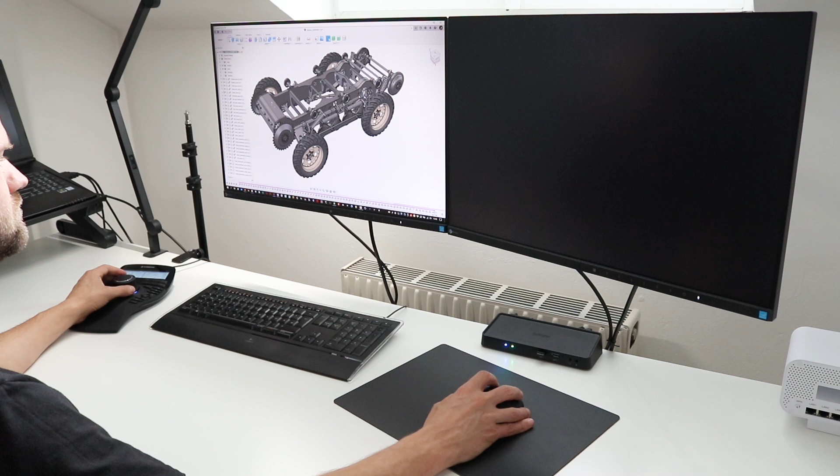Now next, I'm going to set everything up and install the driver. As a right-hander, I place the SpaceMouse on the left, close to my keyboard, so that I can easily move my left hand back and forth between it and the controller. The device itself is connected with a USB cable. On the right, I place the CadMouse on the supplied mousepad.

Now, the thing is, I haven't used a mouse for more than 15 years. I exclusively work with a graphic tablet. This means that I'm the last guy on earth who qualifies for reviewing a mouse, and for this reason, I will also focus on the SpaceMouse Enterprise only in this video.

Nevertheless, I've connected the CadMouse Pro via the little universal receiver for this demonstration, and I can say that it moves effortlessly over the smooth surface of the pad and lies very well in the hand. Like on the controller, all buttons are customizable on the mouse too.

As soon as everything is set up and connected, go to the 3Dconnexion website, click on Software, look for 3DxWare 10, which is the foundation of your 3Dconnexion experience. It's available at the top here. And then I simply download the driver for the operating system of my choice.

When you navigate back to the software page and scroll down a little bit, you will find a list of all supported 3D applications. And as you can see, this list is super long and contains all of the 3D programs that support the SpaceMouse Enterprise and the CadMouse Pro.

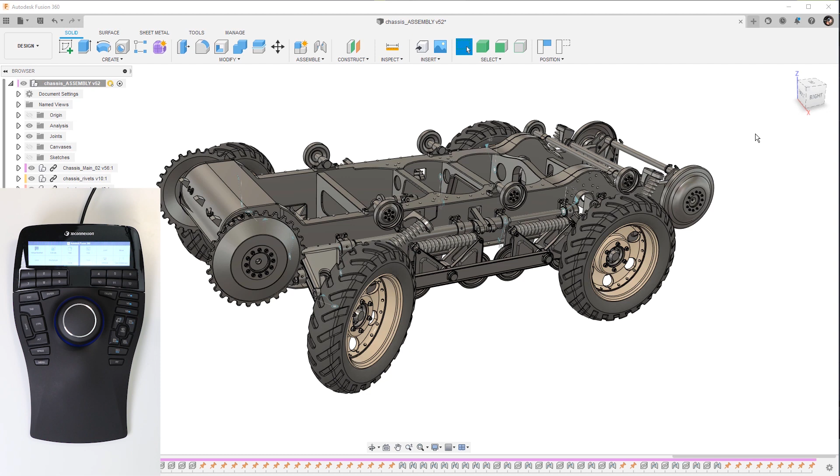And now, let's take a look at how to use the device. Now, let me show you how the controller allows up to 6 degrees of freedom.

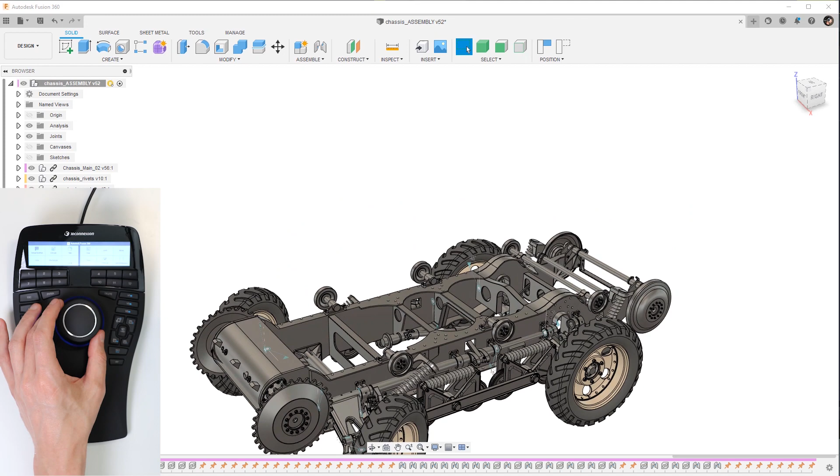So I'm here in Fusion 360, and as you can see, my left hand rests on the SpaceMouse. When I grab the controller and slightly shift it back and forth, I zoom in and zoom out in the viewport. When I move it left and right, I pan the model in the same directions. And when I push the controller down and pull it back up again, the model also moves up and down in the viewport. Now this covers 3 degrees of freedom, with 3 more to come.

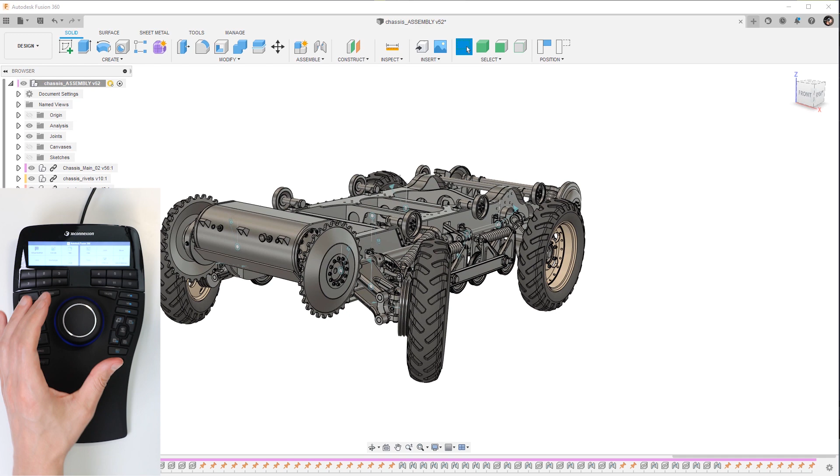When I slightly tilt the controller back and forth, the model rotates accordingly. When I tilt it to the side, it rotates sidewards. And when I rotate the controller along the Z-axis, the model does the same.

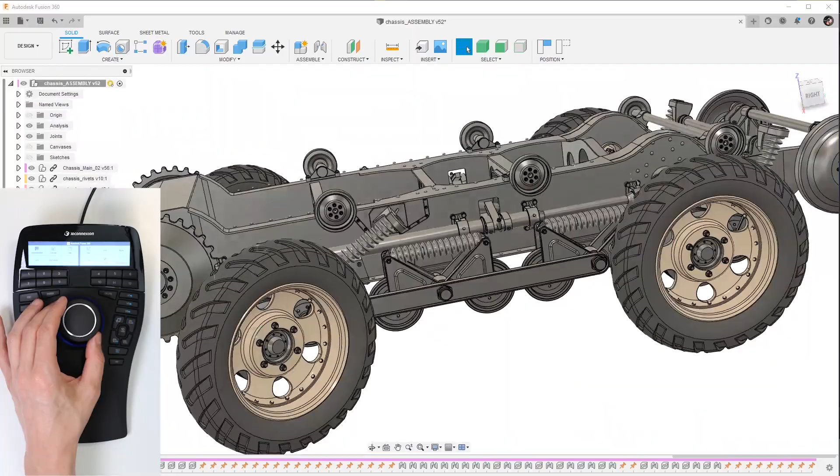So the thing is now that I can perform all of these movements simultaneously. I can zoom in and zoom out while rotating the model, and I can also pan the model while it's still rotating. And all of this allows a very fast and very precise positioning of the model in the viewport.

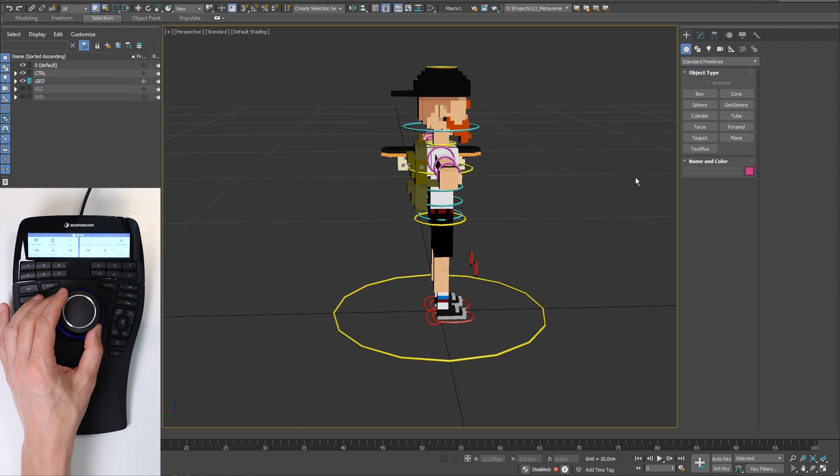When I now switch to 3ds Max, it behaves the exact same way, even if the shortcut keys for viewport navigation are assigned differently. And I'm sure you've noticed that it seems like I just barely touched the controller, but it actually takes quite some pressure as the joystick is mounted pretty firmly, so it's not wiggling around at all. But this is exactly what makes this precise positioning possible in the first place.

Next, let's talk about the buttons next to the controller and the ones below the LCD screen. The LCD screen is not a touch screen, so this means that the icons you see on the screen are linked to the 12 function keys below the screen.

This is probably a little bit hard to see here because the cover of the LCD screen is reflecting the light a little bit too much. But basically, if I switch back from 3ds Max to Fusion, these icons also change, because in Fusion, different tools and different features are assigned to these 12 function keys.

Then on the left, we have 9 keyboard modifiers. And on the right, we have 5 view keys and 3 additional custom view keys. This one here is a lock key, and this one takes away some of the degrees of freedom of the controller. And down here, we have a fit key, which basically centers the model, or centers the camera back to the model, in the viewport of pretty much every 3D application.

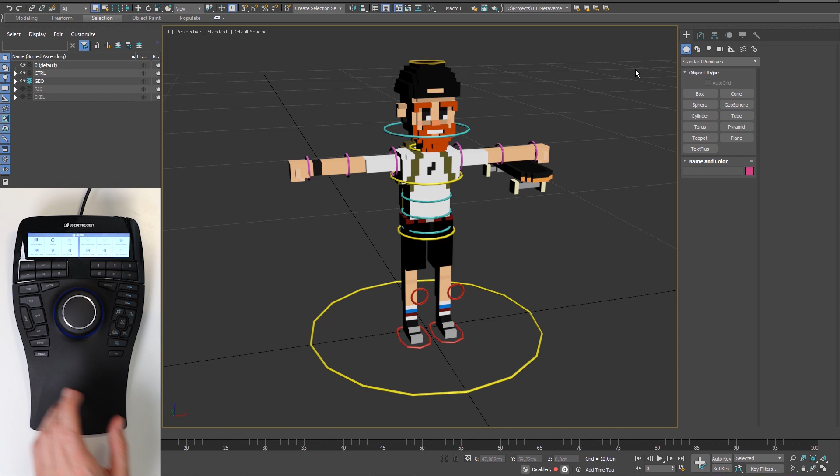Now let's start with the menu button first. When I press it, the property window pops up. As you can see, it tells us that we are currently working in 3ds Max. Down here, you can select the device.

So the SpaceMouse Enterprise is currently selected. I could switch over to the CadMouse Pro wireless, and in this case, the menu down here also changes a little bit. So let's switch back to the SpaceMouse again.

Here we can change the LCD screen settings. I can, for instance, lower the brightness. If I move the slider over to the very left, I basically turn off the screen, and down here I can change the icon size from small to large. So the difference is not that huge, but I'm gonna keep it at small for the moment.

And here you can change it to icons only or text only, and it changes immediately also on the screen. So I keep it on icons and text, and confirm this.

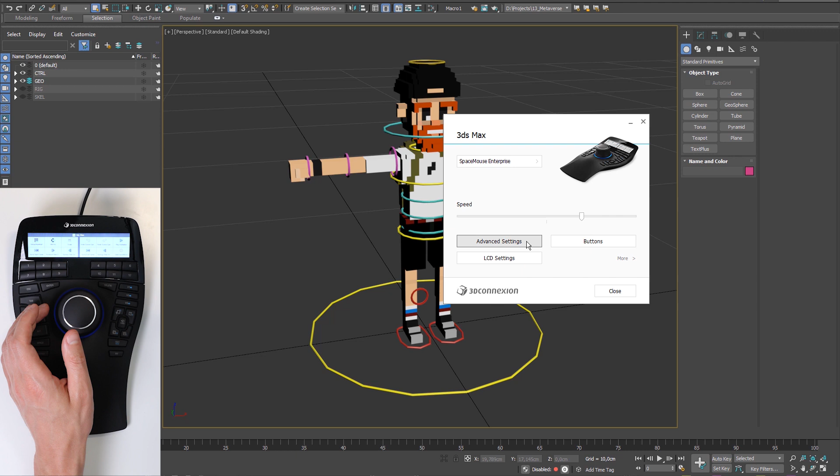And now let's take a look at the advanced settings here. So when I click on it, again, these settings are individual for every 3D application you're currently working in. These are not universal settings, and this also means that the settings, or the amount of settings, changes depending on the application you use.

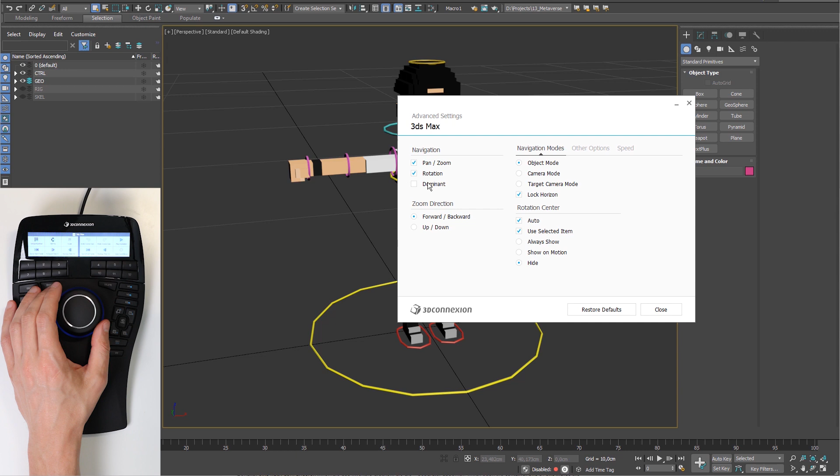Now, when you enable dominant, and let me move the model over to the side so that we can see what's going on. When you enable dominant under navigation, then you basically take away the ability to pan, zoom, and rotate the model simultaneously. So this basically means that I now zoom, pan, and rotate one after the other.

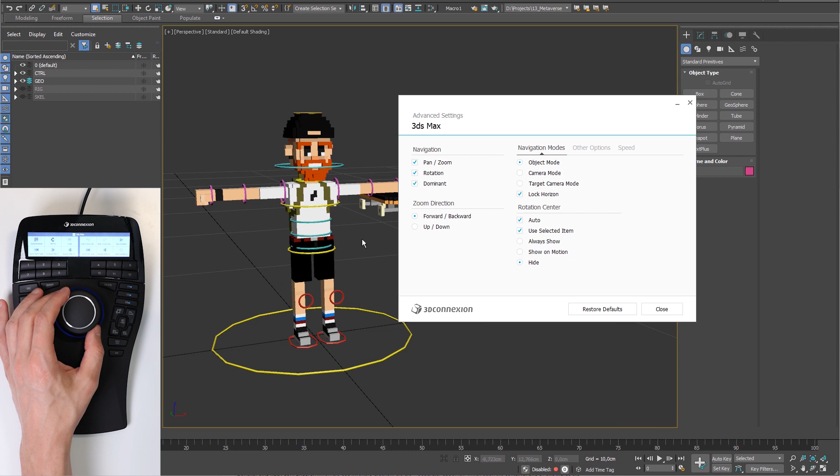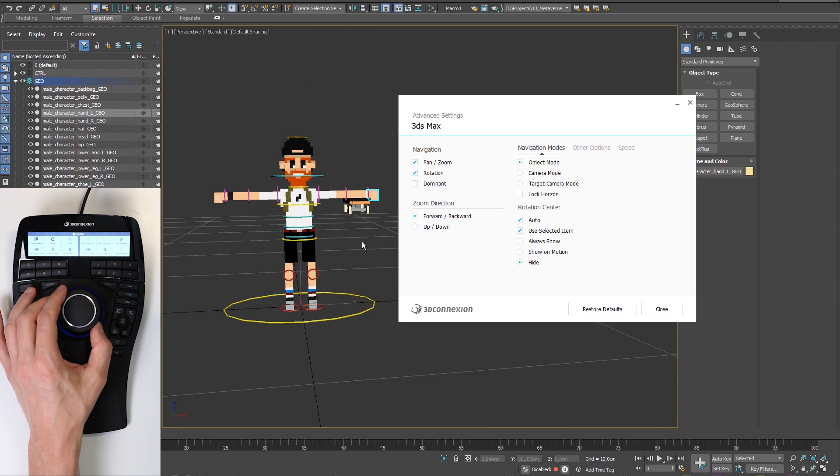And whenever you feel that the controller behaves a little bit strange, then this is usually because this dominant function is enabled. So make sure that this one is always unchecked to have access to the 6 degrees of freedom all the time. In 3ds Max, the horizon is usually locked. So when I uncheck this one here, I can tilt the camera around in the viewport, which is probably not the best idea. So if I enable lock horizon again and touch the controller, it snaps back in place.

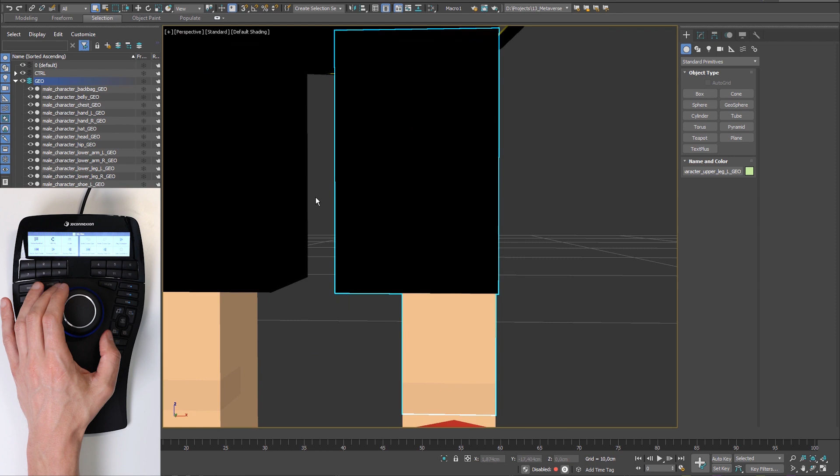Now for the rotation center, auto and use selected item is enabled. So this means that when I, for instance, select the upper leg here and click the fit button, it zooms into this element, and then also the center of rotation lies inside the upper leg. The same goes, for instance, when I select the hand here, then the center of rotation is inside the hand.

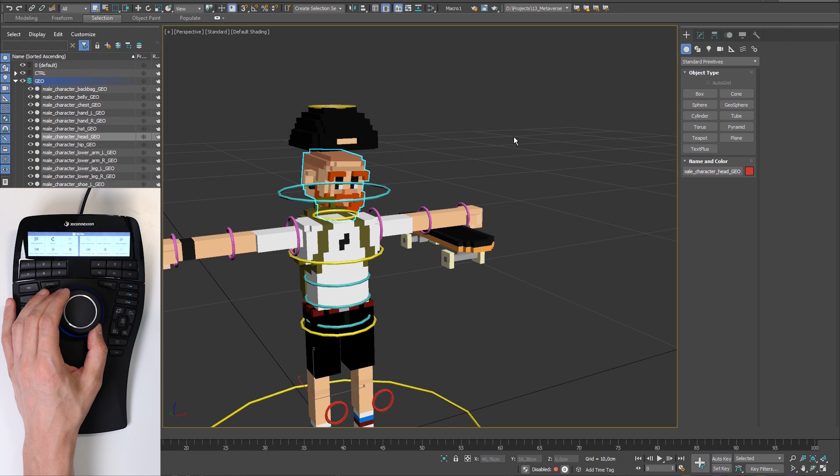So let me bring back the menu one more time. And then I switch to other options, and here I check move objects, select the head, and now I can use the controller to move objects around in the scene. So this comes handy when you do animations, for instance. So let me undo this, bring back the menu one more time, uncheck move object, and move over to speed.

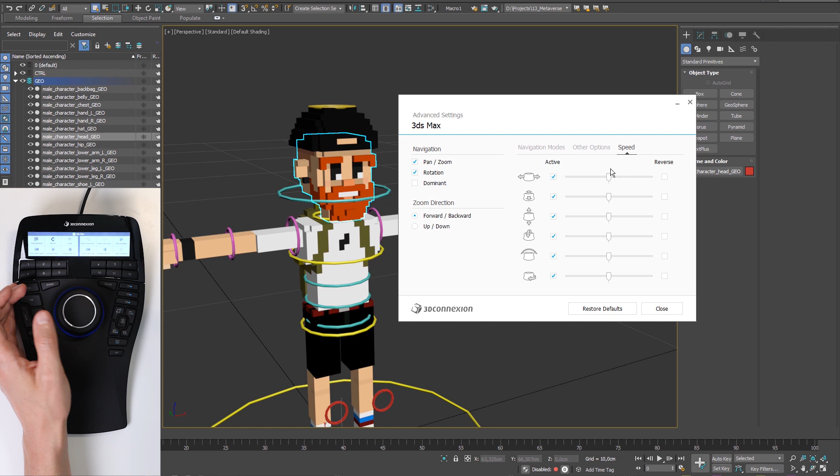And here you can basically change the speed for every axis. You could also reverse it here or activate and deactivate it. I usually don't touch anything here. I leave them all in the center, and I go to the main menu and change the speed here by moving the slider over to the left or to the right, and this changes the speed for all of the axes simultaneously. Then let's also take a brief look at the buttons menu.

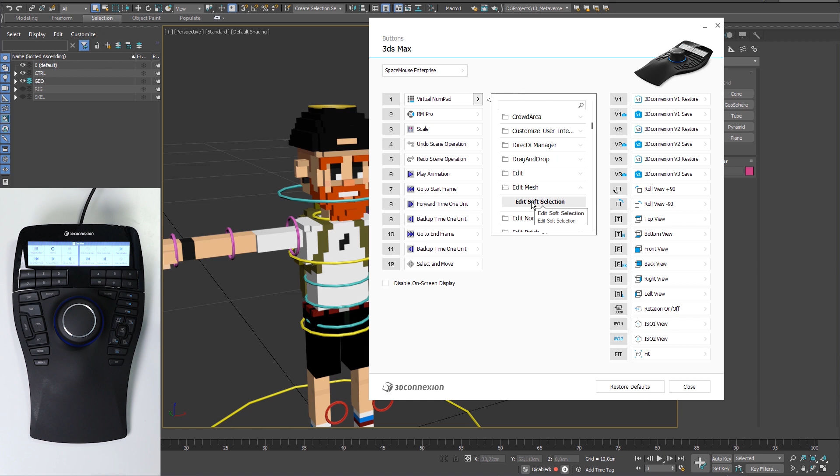And when I now go over to one of these 12 function keys, I can, for instance, select one of the many controls that are available in 3ds Max. So let's go down to Edit Mesh and select Edit Soft Selection. And this one is now assigned to the first function key in the list. As you can see, it also shows up on the LCD screen, and when I now press this button, this function is enabled. So I'm gonna set everything back to defaults again and close this menu.

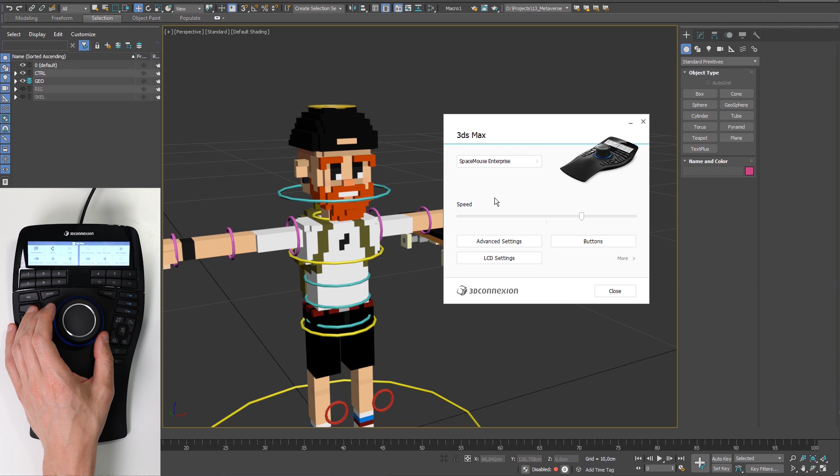Now another thing I want to show you is how to use the view keys and the custom view keys. So I'll close the property window first, and when I press the ISO button, it rotates the model into an isometric view. The little F here stands for front view, right view, top view, and 90-degree angles. So when I click on this button here, it rotates the model into the front view.

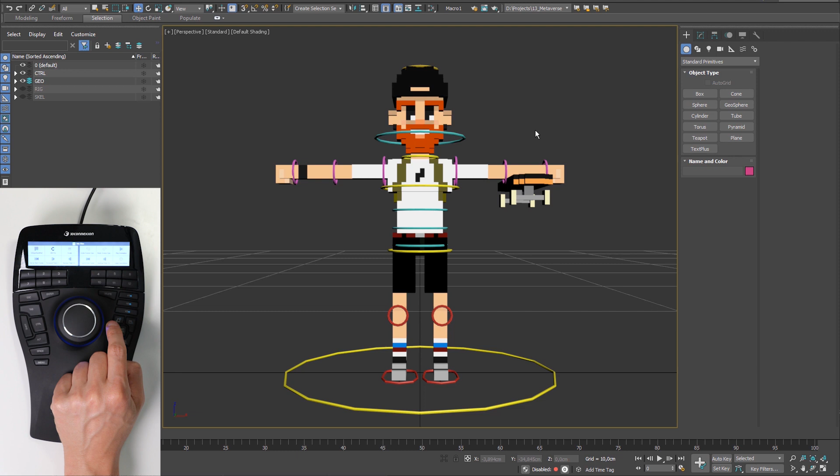When I now try to rotate it by 90-degree angles, nothing happens because the horizon is locked. But when I switch to the top view and press this button again, then the model rotates by 90-degree angles. So I switch it back into ISO view. Whenever you see these little blue additions to the title of each of these buttons, it means that two functions are assigned to it. So this means that, for instance, for the front view, if I press it once, I turn the model into front view. If I press and hold it a little bit longer, it turns it into back view.

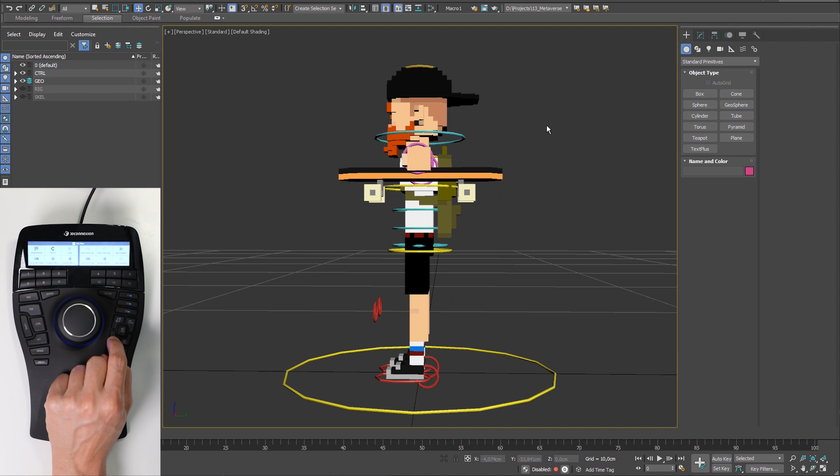Of course, the same applies to the right view here. So if I press it once, I see it in the right view. And if I press and hold it for a little bit, it turns into the left view. So let me switch back to isometric view again.

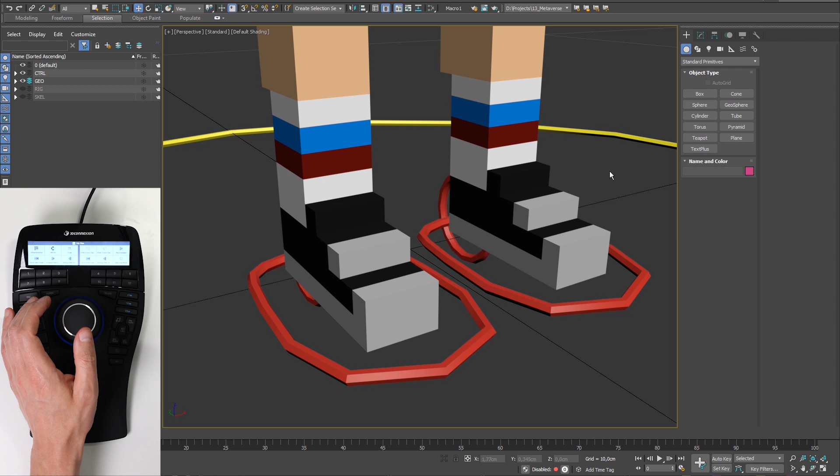A very nice addition to these quick view buttons are the custom view buttons. So let's say I work on the feet of this character. So I zoom in and then I press and hold this V2 button, for instance, for a second or two until this message pops up. So this one tells me that the device has stored the configuration, and then I zoom out a little bit, press the button again, and it gets back where it was previously.

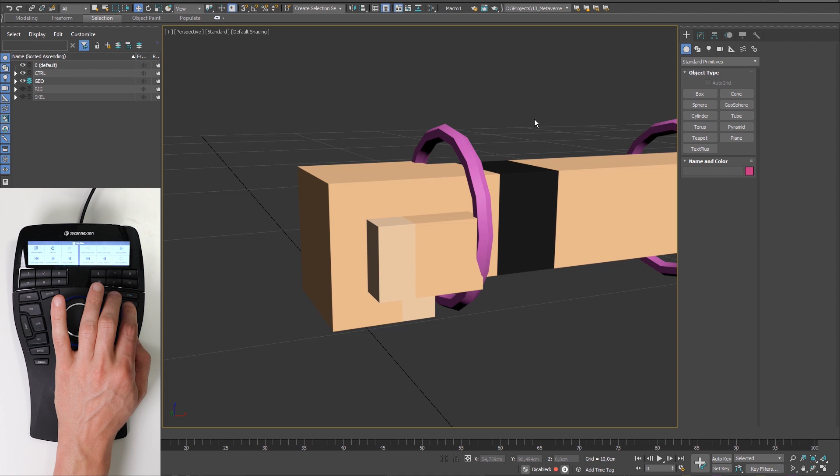So let's say I work on the hand, then I zoom in to the hand, press and hold the button for a moment, and when I now zoom out again, or let's say I set it into isometric view and press this button, it zooms into the exact same location as I had before, and so I can switch between different views without using the controller at all.

And you can also press and hold one of the 12 function keys, and if you do this long enough, then this little head-up display appears on the screen, and here you can see what function is assigned to which key. Now I'm back in Fusion 360 and I have briefly assigned some of the tools to the 12 function keys. So I start a new sketch on the top plane first.

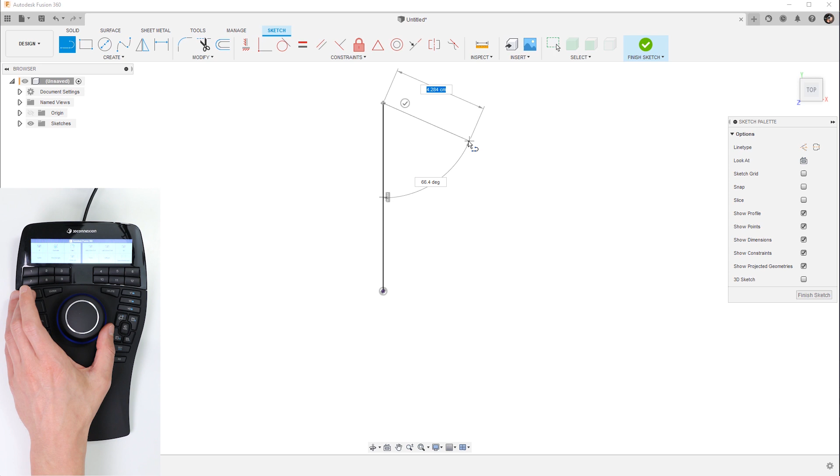Here I draw a straight line, I exit the line command, I add some dimensions. Let's make this 10 centimeters long and also turn it into a construction line. And now I'm of course still able to rotate the thing, which is not ideal as long as I'm drawing on a planar sketch plane. So I set it into the top view first, then I hit the lock button, and now I'm only able to pan and zoom the sketch.

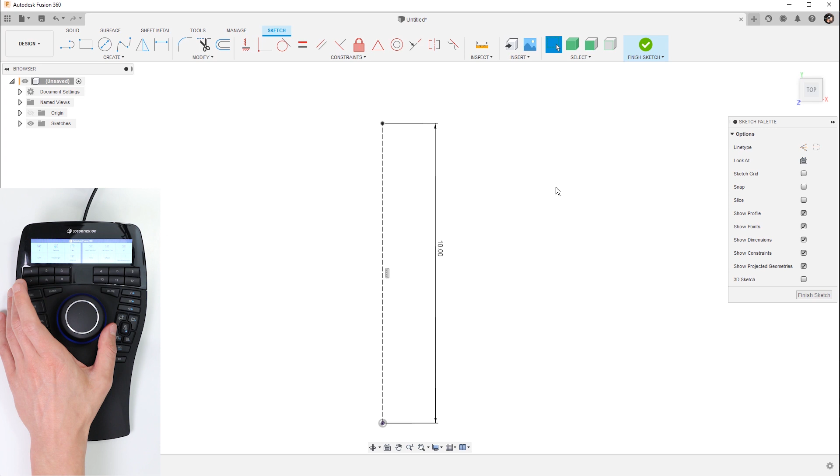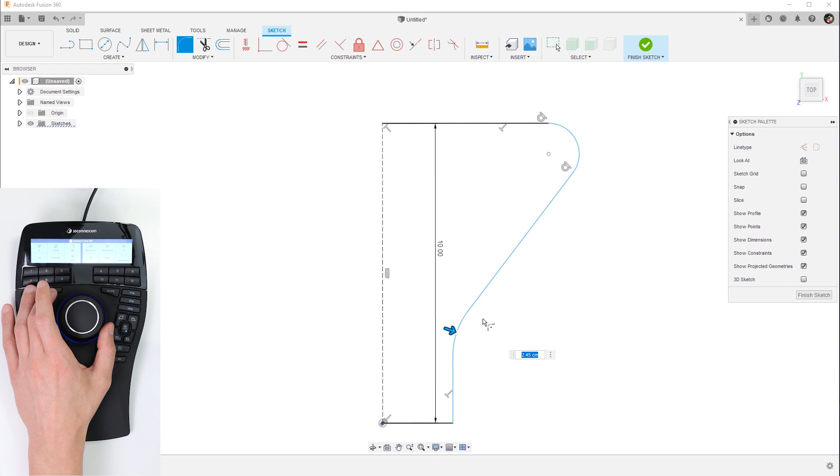This is exactly what I'm looking for before I continue with a straight line at the top, followed by an arc, another straight line, and let's close this off at the bottom, like so. Then I select these two sketch entities, make them tangent, and let's also add a fillet around here, something like this. And then I double click on one of these lines to select all of them.

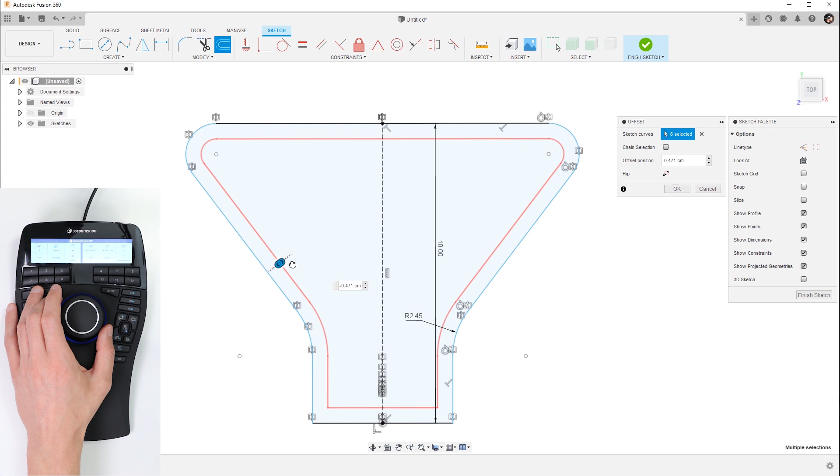I run the mirror command, select the construction line in the center as my mirror line. Double click on this sketch entity again to select one half, then I hold down the control key and select the other half, and then let's also run the offset command and offset it like so. And now it's time to unlock the controller again so that we can rotate the sketch, before I click on the outer profile, open up the extrude command and extrude it a little bit.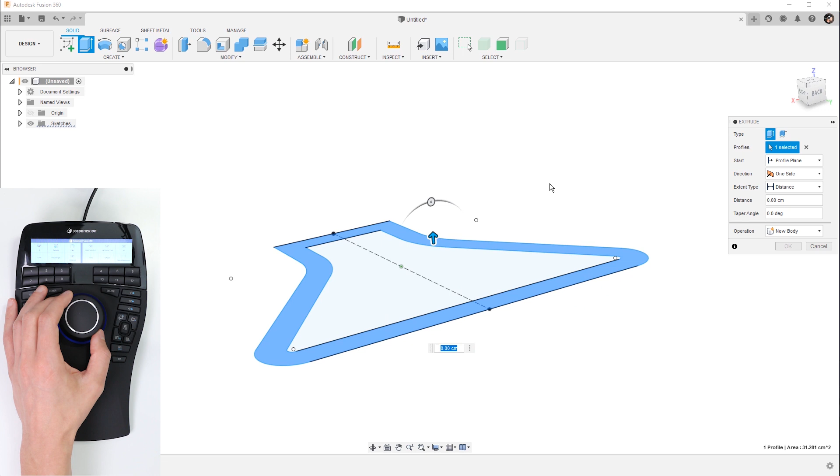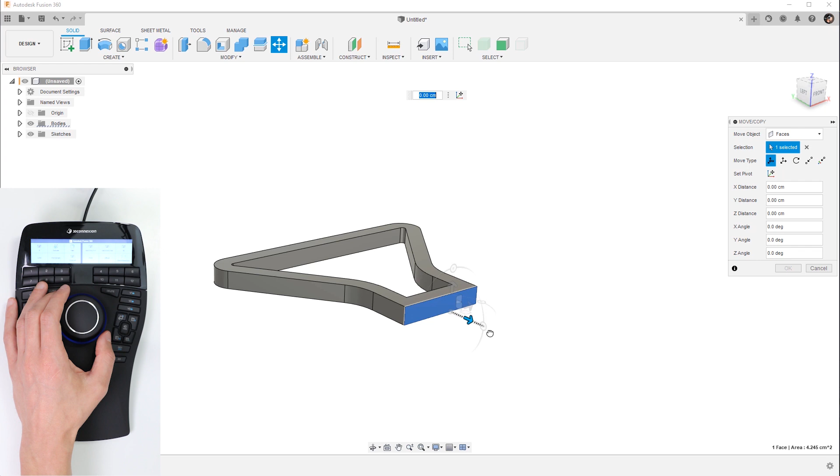So this is what I was mentioning in the introduction. I can rotate, or I can navigate in the viewport and still have my cursor available to do all kinds of operations. So I can, for instance, keep rotating while I extrude this, and this speeds up the workflow quite a bit. So let's add some thickness, and I'm also gonna move this bottom face down a little bit before I complete this with a few extra fillets at the bottom, and maybe also round off these inside edges a little bit.

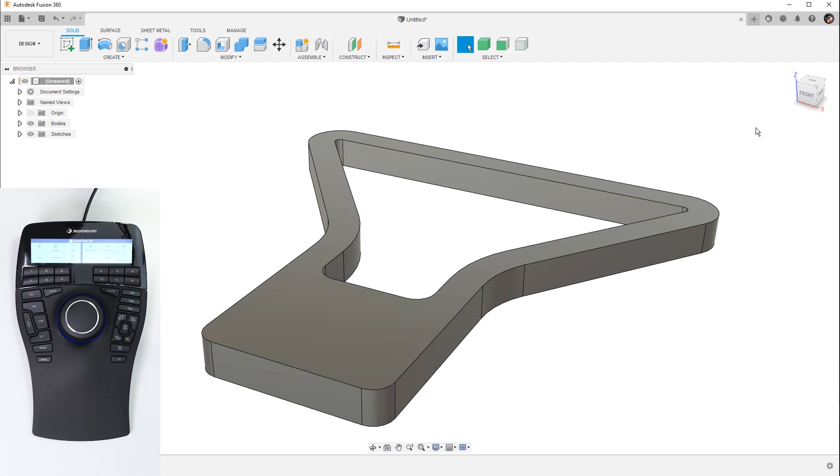As you can see, I was able to draw this while keeping my left hand on the SpaceMouse Enterprise all the time, so it wasn't necessary to touch the keyboard once. And finally, the SpaceMouse Enterprise now also works in ZBrush. Navigation is super smooth and very precise.

The only downside maybe is that you are not able to manipulate the surface and navigate at the same time, but this is probably due to the fact that in ZBrush you do not orbit the camera around the object, but you actually rotate a 3D model on the 2.5D canvas instead. But besides this, it's a fantastic addition to ZBrush. This is already it for today's video.